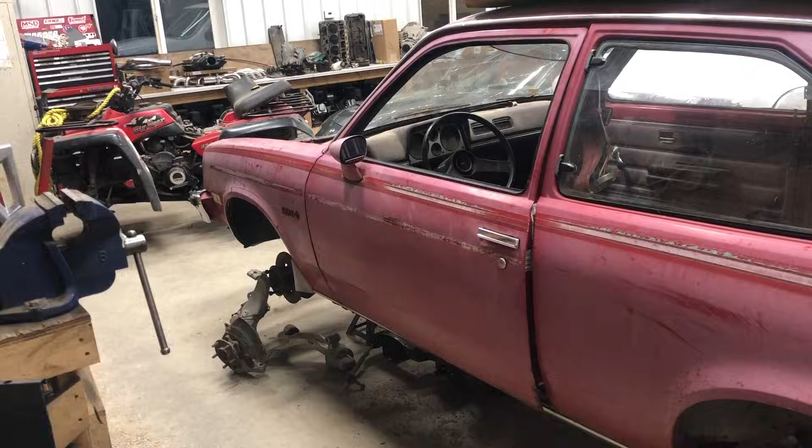We are back on the mid-engine Chevette. I haven't forgot about you. I haven't forgot about this project. It's just been on the back burner for a little bit. As you can see, we got it up on jack stands at the front of the shop here, and we're starting to take some parts off.

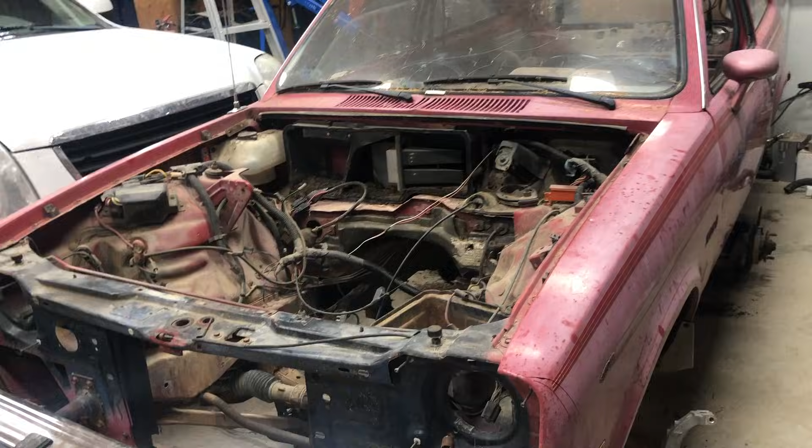If you recall, this car was actually meant to be given to my students. The girls in my grade 10 class last year rock, paper, scissored over this car, and they chose this as their potential race car. And then we started looking a little closer. Yeah, it's pretty ventilated. So we ended up giving them the cream-colored Chevette, and actually that turned out probably really well. So that leaves me with this car, and I've decided to make this to be a mid-engine, eventually all-wheel drive Chevette. We're going for broke.

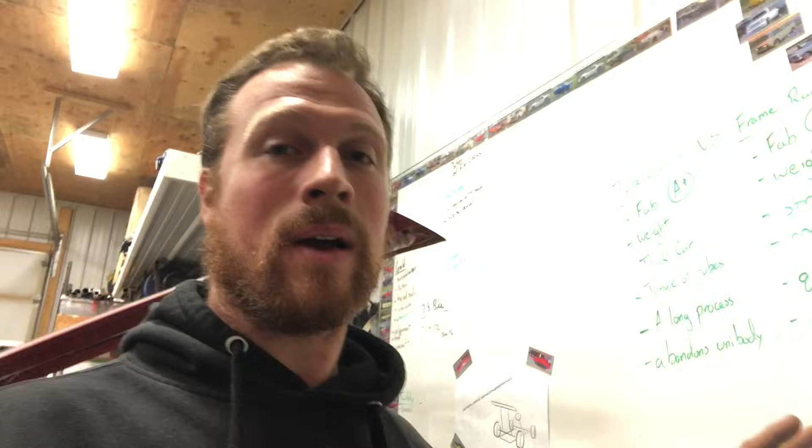Today, the first thing we need to decide is a game plan on how we're going to get there. A wise man once told me, before you actually build a project car, you need to determine its purpose. It's kind of like us as people. If we don't have a purpose, we struggle. We run into all sorts of problems. Well, my purpose for this car is to be a street car that can do some autocross or short circuit racing.

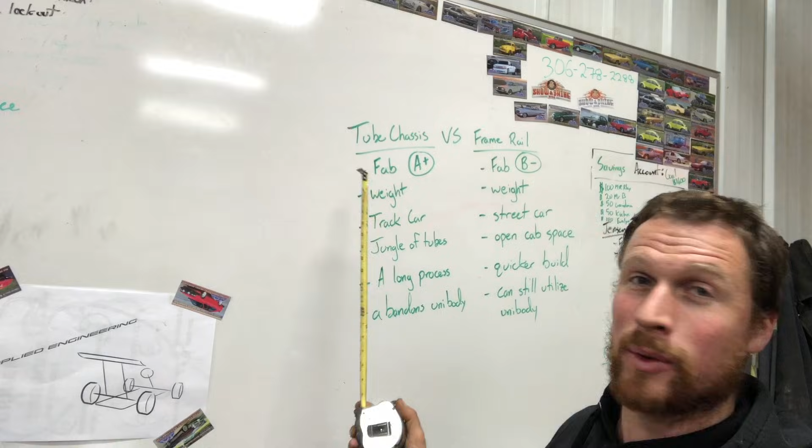Whenever you're starting a pretty intricate, very intense swap, you have to break it down to the structure of the vehicle. I think there's two camps. On one side, we got tube chassis cars, and I think a lot of people just automatically jump to that. Oh, it's gonna be a crazy swap, we're gonna make it a tube chassis car. On the other side, we have the more traditional frame rail car. And this is the decision that I have to make. Let's go through this right now.

First of all, if you make a tube chassis car, I would say you get an A+ for your fabrication skills. When people see that, oh, it's a tube chassis car, they're like, oh yeah, he knows how to weld, that kind of stuff. And I agree, yes. I haven't done a tube chassis car myself before, but I'm not sure if this is the time I want to do one. If you make a frame rail car, like some good old 2x4 HSS, you're gonna get a B-.

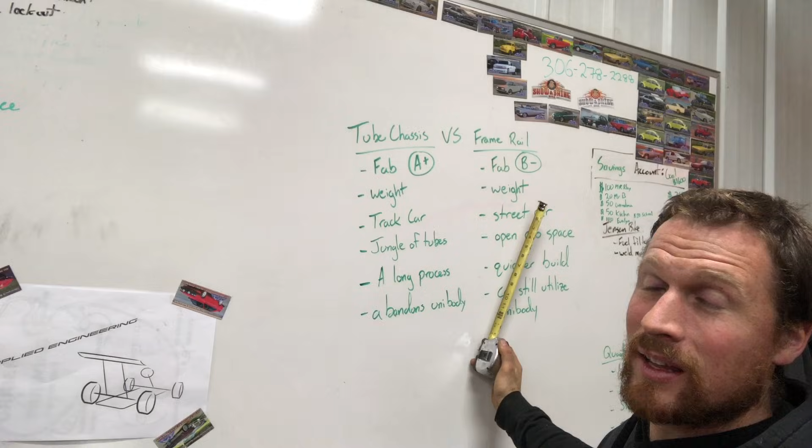Next, weight. I think this is a little controversial, but you get a few more points for body stiffness in a tube chassis car. I think in a frame rail car, if you can handle a little more body deflection, or you're just not quite ready to commit to a cage, I think the weight's probably about the same. Honestly, if you think about it, you got one 2x4 going across the bottom versus probably 3 tubes in a tube chassis car. They probably weigh about the same if you were to take like the section weight.

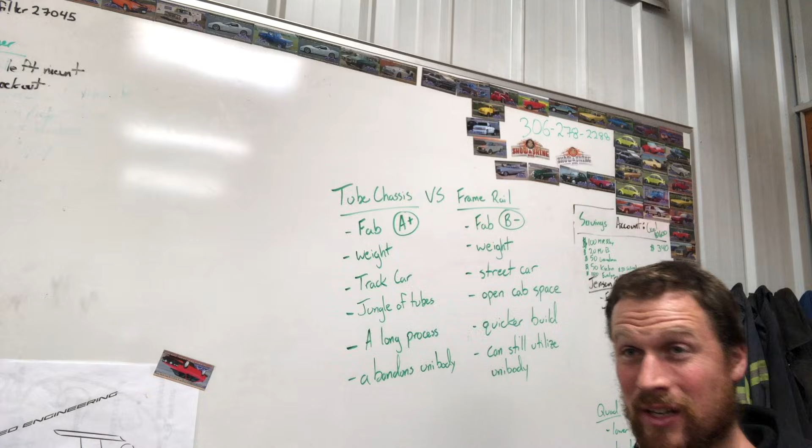Next point, and this one's a pretty big one for me. A tube chassis car, that's mostly track car stuff. Like if you get pulled over by a cop on the side of the road and he sees this jungle of tubes all around you and you're not wearing a helmet, probably more important, if you get into a collision, even a minor collision on the street in a tube chassis car without a helmet, it's not looking too good for you.

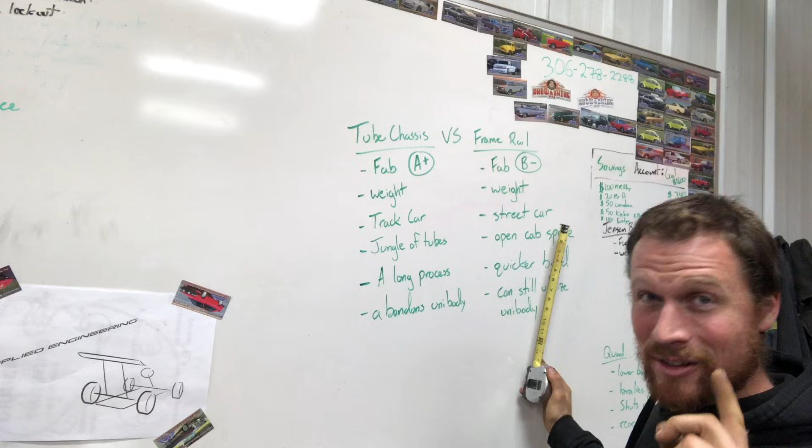Frame rail cars, they are street cars, and I kind of want to street drive this thing. That's the whole point of the car. I love driving my cars. I don't have a trailer because I don't want to trailer my cars to the track. That makes me lean this way a little bit here just for the street car part.

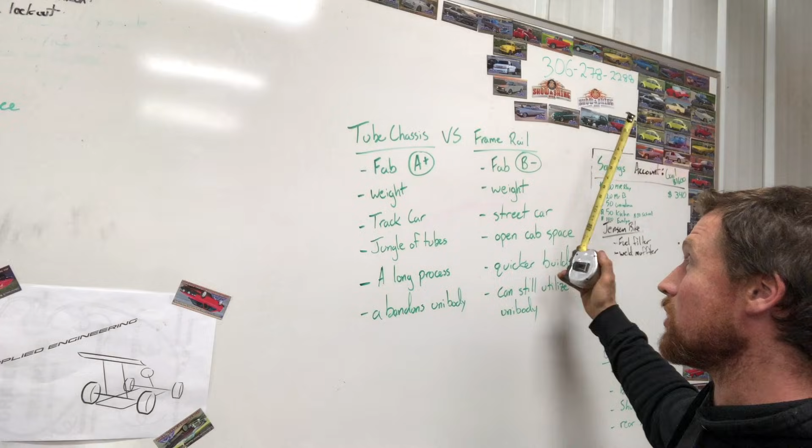And yeah, that's the next point. It's a jungle of tubes. There's an open cab in a frame rail design, and that suits me maybe a little bit because I want this mid-engine to be on display. This one was kind of the tipping point for me. It's a long process to make a tube chassis car.

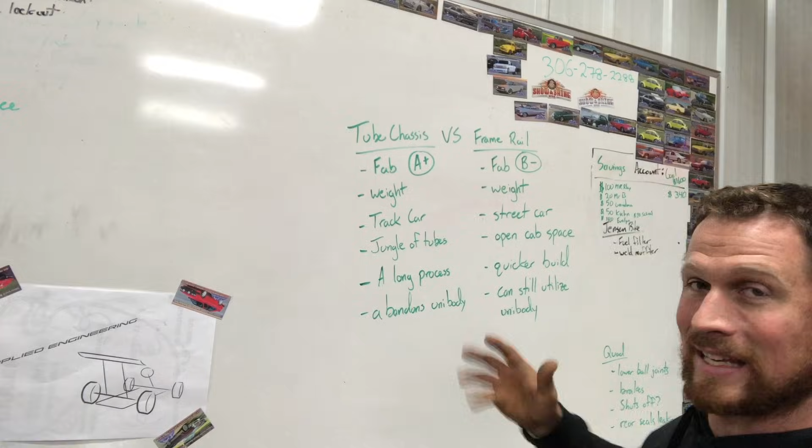Not to say that the frame rail car is a lot quicker, but it is quicker, and I don't want this thing sitting in my shop forever. A lot of tube chassis cars are sitting on an alignment rack somewhere in the back of a C-can for too many years. I want this thing put together. This whole stage is like, get it rolling. Just get it rolling so I don't have to have this in the front of my garage like a lawn ornament.

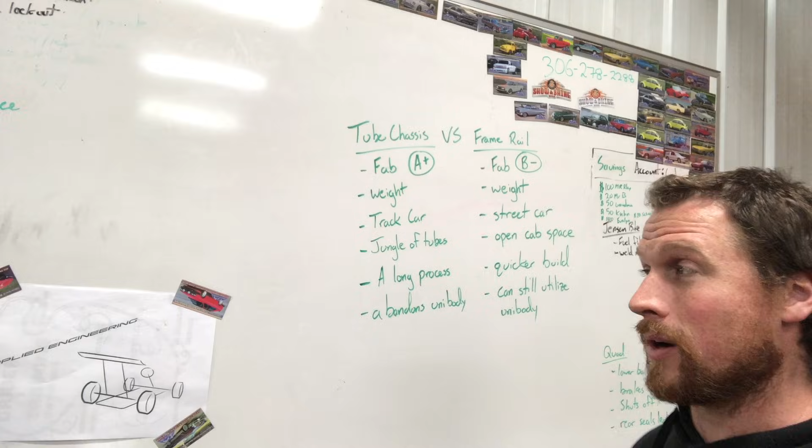Last thing I'd say, a tube chassis abandons any of the unibody potential that's in your vehicle. A frame rail car can still utilize some of that unibody that is available to be utilized for structure. I mean, the Chevette is a unibody car, so obviously there's some thought in a unibody. Not that I'm going to rely on it a lot, but you can a little bit. Like even look at the G-body cars. If you take a frame off of a G-body, it's kind of like a limp noodle. It's not that strong. And so obviously even the G-body cars rely on the body to give it some structure.

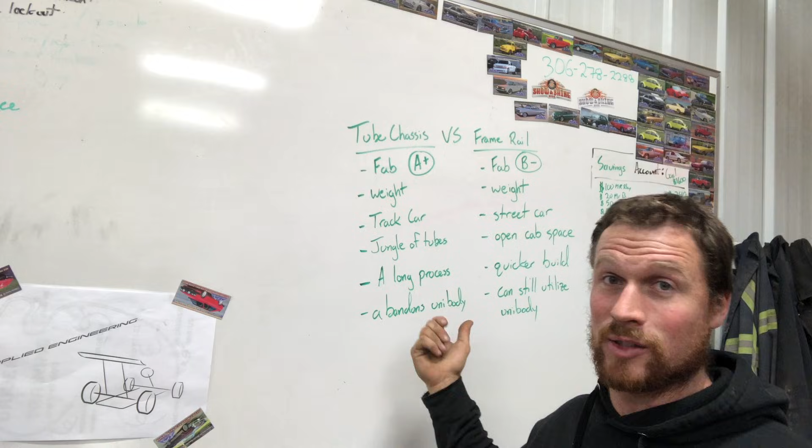All of these things considered, I'm going to go with the frame rail. Sorry, you can unsubscribe if you want, but I'm thinking we're gonna just get this thing rolling so we can go have some fun with it.

Well, actually, before we even do that, we need to just get the car better. The whole reason this car is here is because it was too rough for my students to work on. So we're gonna fix that first. We're gonna do what I do to all these Chevettes: take a nice filing cabinet and recreate this rocker panel.

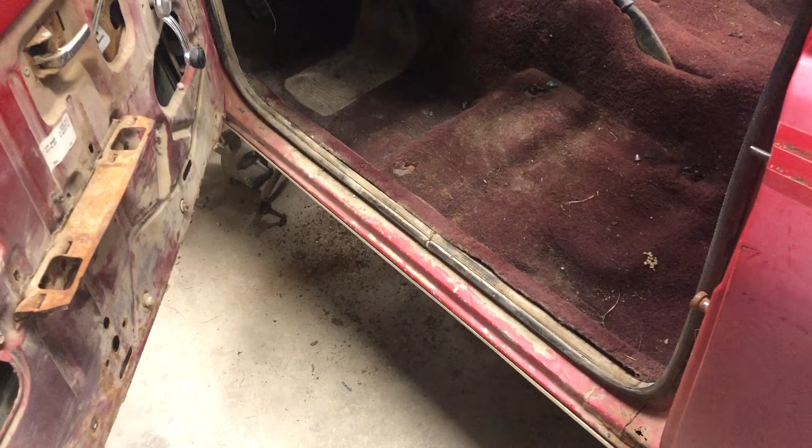The other thing we're gonna do is start building our frame. GM gives us a really nice starting point on these cars. The inner rocker panel on a Chevette is about 4 feet long, it is totally straight, and it is exactly 4 inches tall from the front all the way to the back. Thanks, GM. I'll forgive you at least one lifter failure for that.

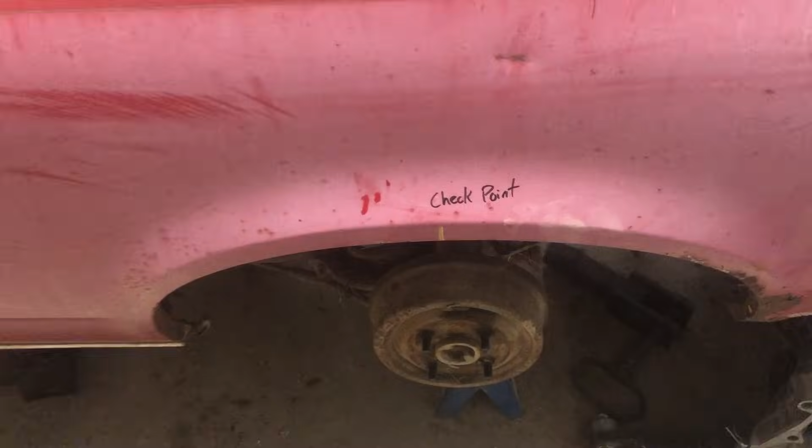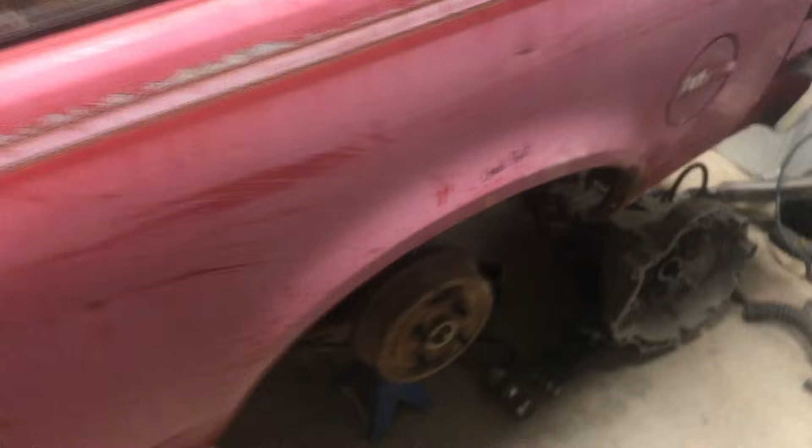But before we start cutting, there's a few measurements. I'm gonna drop a plumb bob, I already did, and I made 3 checkpoints on the car. With those 3 points, if the car were to get bumped when you're cutting the diff out or the suspension out, we can realign it so we know exactly where it goes on the floor. And that means I can mark these things on the floor now. I have the center line of the wheel and the wheel mounting surface.

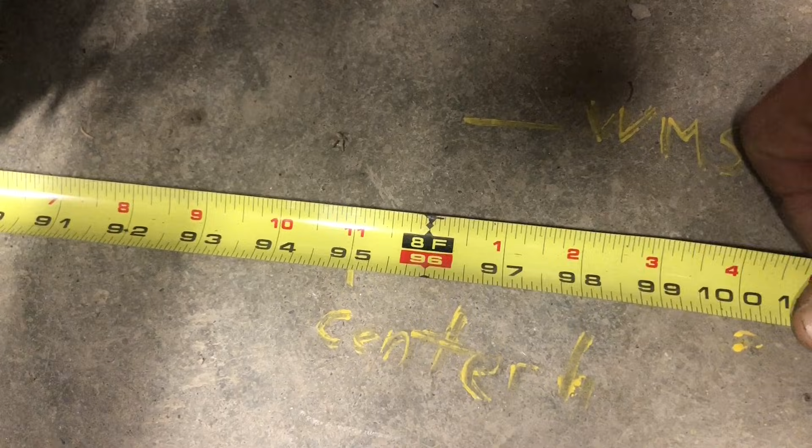This is also a good time to check if the chassis we're starting with is straight. The factory wheelbase of this car is 95 inches. We are like 1/16 big. The other side is like a 32nd big. So we're gonna call ourselves like a 32nd out from factory spec. I think that's pretty good. So now the fun part. Let's start cutting.

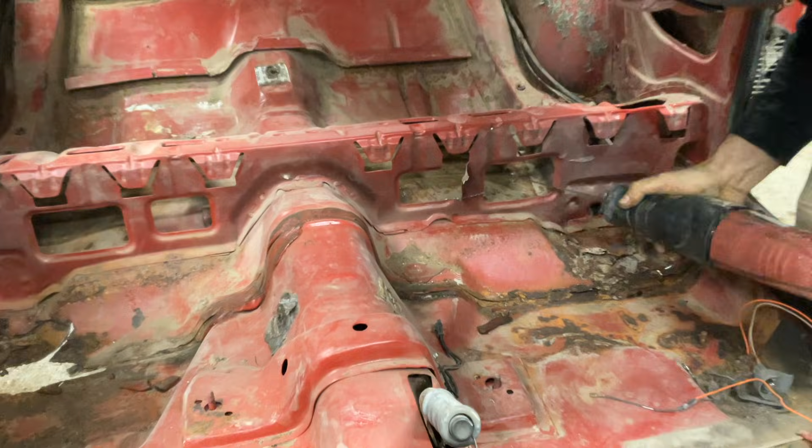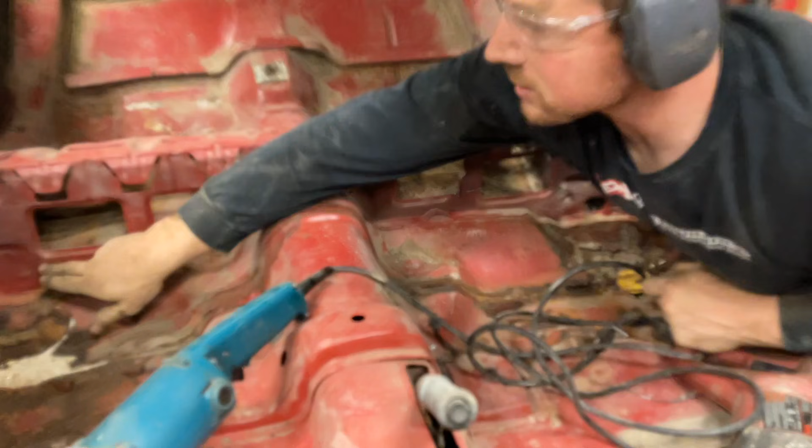Fun fact of the day, a Chevette uses the cage of the rear seat kind of like a body stiffener. If you ever look on a Chevette, you'll see this. From all the body flexing over the years, this little box structure cracks in all of these spots where the ribs are. Originally, they have a torque box along the sides underneath the door, and then another box that comes about 8 inches in from the edge on either side. And the only thing that connects the outer boxes to the inner boxes that eventually become the rear subframe is the seat.

Now that I have part of the seat removed, you can see this a little better. So here's the B-pillar, and this is the box that goes from the inner rocker panel slash rocker panel that makes a box here. And then here's the beginning of the rear subframe. And there's this gap in between the two. Nothing connects them except for what would be the seat.

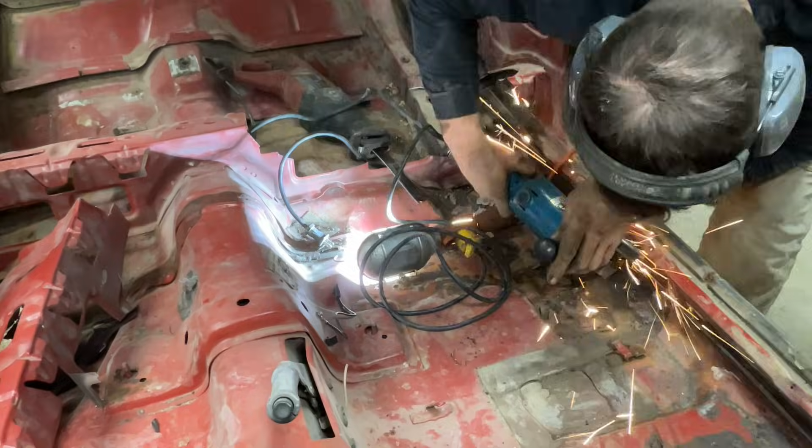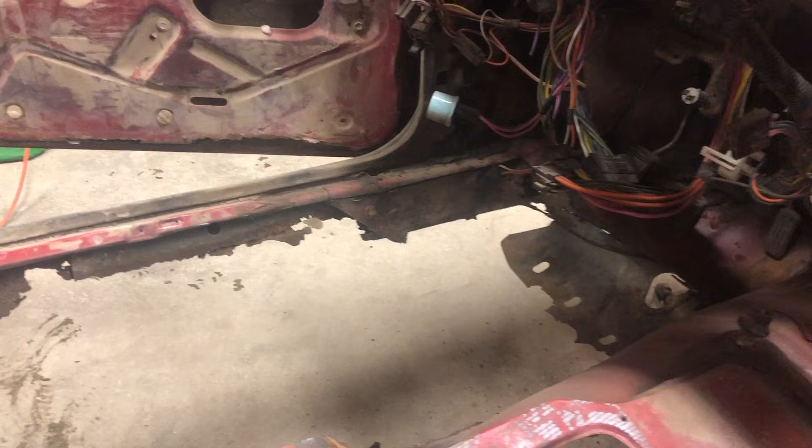Autopsy report. Yeah, it's a pretty rusty unit. I would say this car would be too far gone for really anything else. It's probably too far gone for what I want to do with it, but we're gonna bring it back because we can.

Right about there. What I'm gonna do next here, I'm gonna get some measurements that are common on both sides so I can make sure I put these pieces in the same spot on both sides. And then I'm gonna start tack welding across the top here. After that, I'm gonna make sure these are plumb to the ground.

You'll notice too, I'm only doing one side at a time. So I have that side still all together, but I'm also trying to keep the body as rigid as possible for as long as possible. Once I get this side welded in, I'll go in and do that side over there, and then I'll put some braces between the two and cut the rest of the floor out.

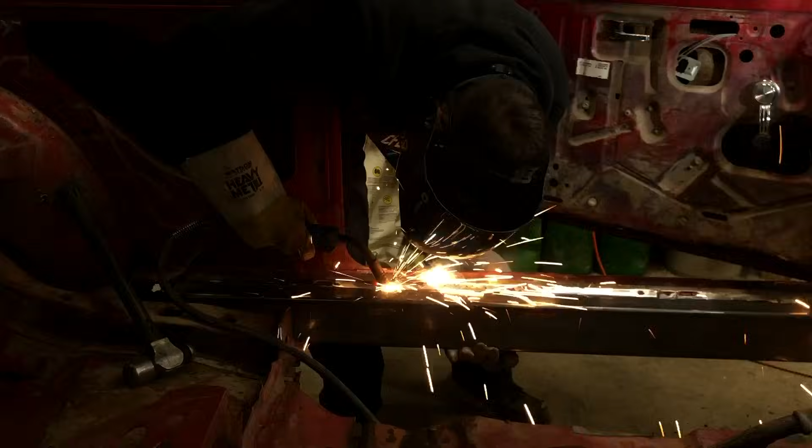And there we have it, the beginning of our frame. I know this may seem a little bit crude just to eyeball it off of this line. We are gonna get a few things right on the dot. Obviously, we're gonna get the wheelbase, the track width, all of those things nailed right in. But is this surface gonna be within 1/1000th of that surface that eventually shows up on that side? Probably not, and that's okay.

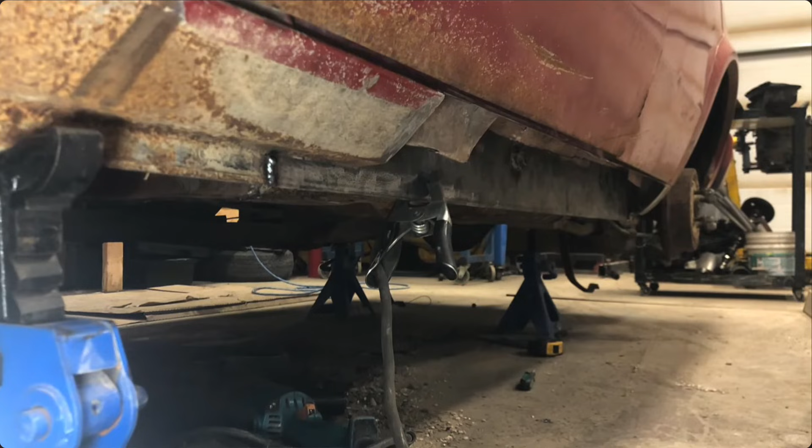If you have a regular Chevette, what I normally like to do here is just get a piece of like 3/16 flat iron that's 4 inches wide, and you can weld it. This right here is where the body seam should be. And I think this applies to quite a number of cars actually. The inner rocker panel is pretty straight. You can really stiffen up a body that way. All right, keep welding.

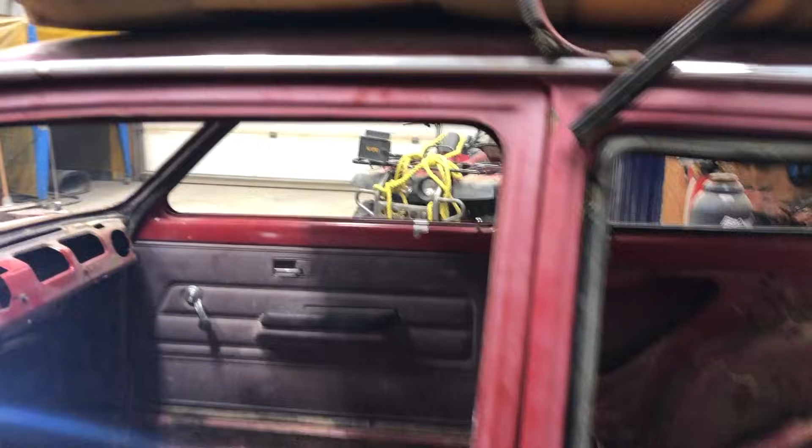Assessment time. Still straight. That's how you know it's in there. There's no weather stripping behind it right now, so this should actually be about there when it touches the weather stripping, but it lets it go past right now. But if you look at the gap itself, when I hold it there, the door gap is nice and straight, and that's what really matters. No one's gonna take a micrometer to your frame, but they are gonna see your door gap and they might close your door.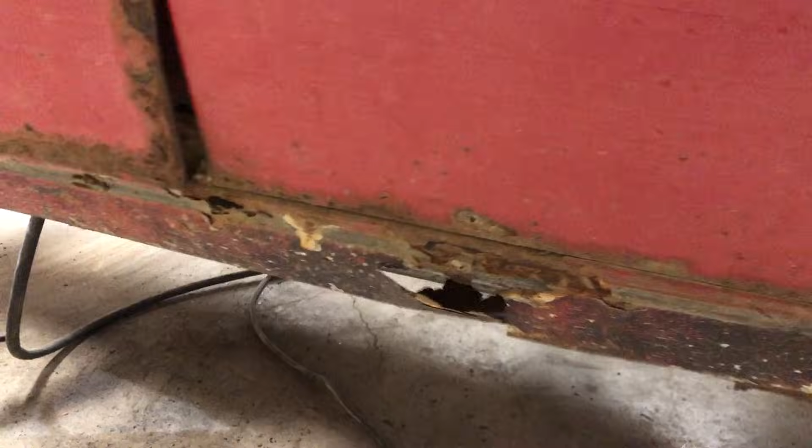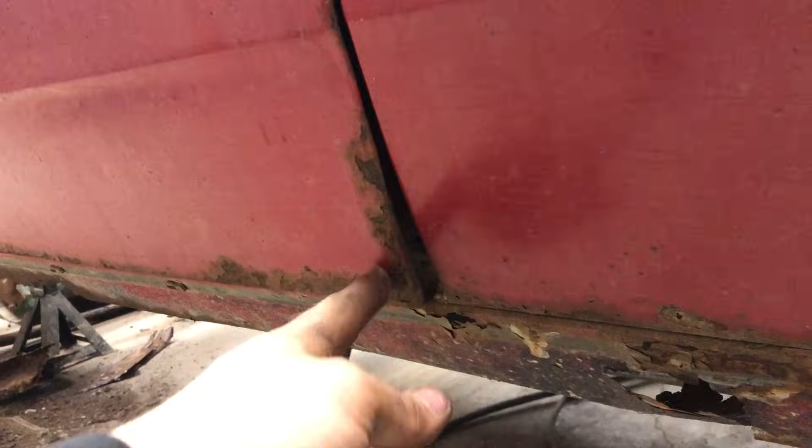This brings us to stage 2, which is the rocker panel, or lack thereof. There's a couple real common rust areas on a Chevette. Rocker panels, number 1. Second is the doors delaminating. The door is basically glued to the inner skin, so this lower part always hangs out and looks ugly. Right about here is where the welds start, and that's the important part. So I can't even use the door really as my basis for where I'm gonna guide off of, but I'm gonna have this point here and the point at the front of the door.

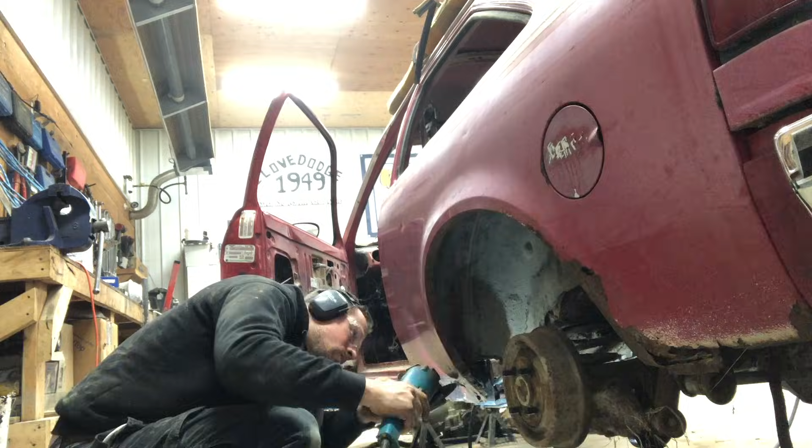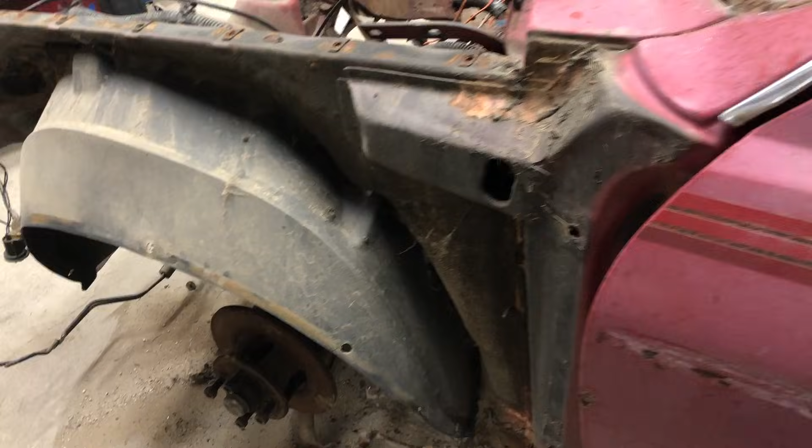Well, bodywork. It's always worse than you think. So we're gonna have to fix that. You know what though? This is maybe a blessing in disguise. We now have access to all of the space inside of here for now. Like right in there, that's gonna be where the frame keeps going on. So for now, this is just going to give us access. We'll have to do some welding in here probably anyways. And then we'll cover it up with some nice new sheet metal.

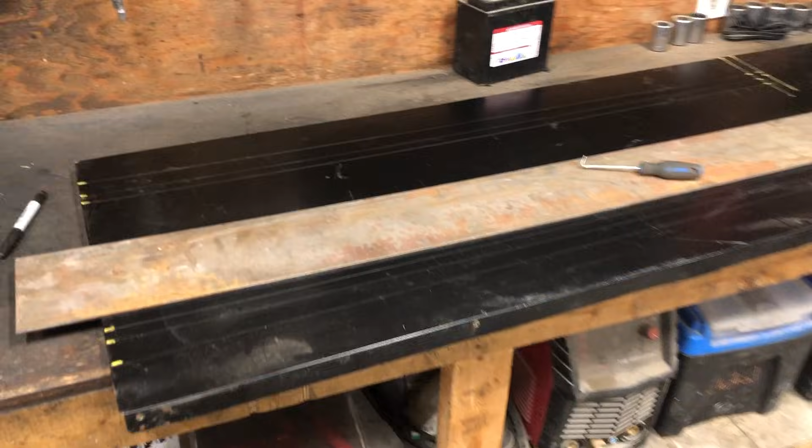Now, a moment of silence for the filing cabinet that's donating its metal to this project. So here's a rough idea of what those measurements look like. In practice, my filing cabinet is not long enough, so I'm gonna have to make this in 2 pieces, but I'm gonna butt weld them together first before I start bending them, so I have one piece of metal that I start with.

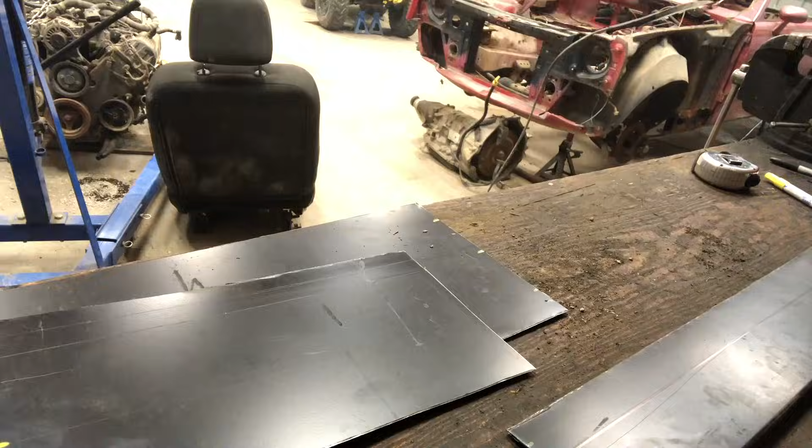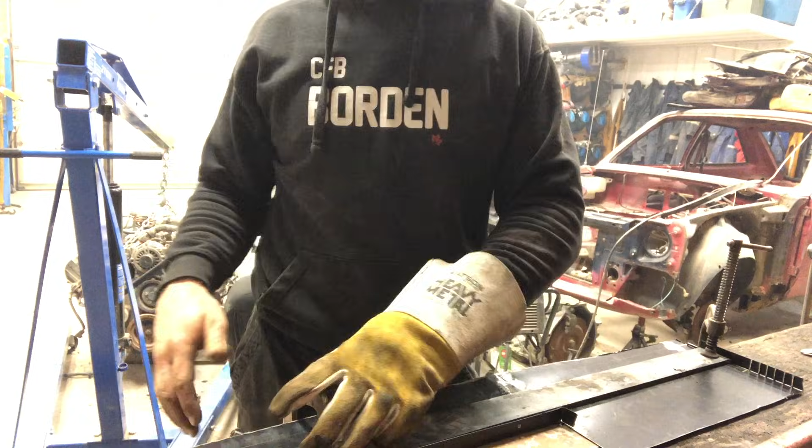Now, unless you have a really nice 6-foot metal brake, you're gonna have to improvise on this part. Making the body lines, what I have here on my bench, I got some big pieces of flat iron that are C-clamped and vice gripped right down to the bench, and I'm sandwiching the piece of metal right where the bend is supposed to be.

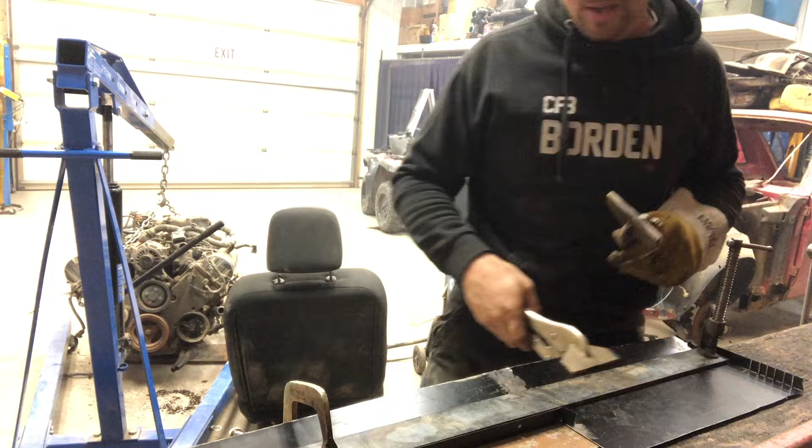Then I'm gonna take some sheet metal vice grips and I'm gonna slowly work at this. Yeah, it's not gonna be pretty, it's not gonna be the most beautiful bend to begin with, but if you just slowly work your way up and down the bend so you don't get a big rainbow in the whole thing.

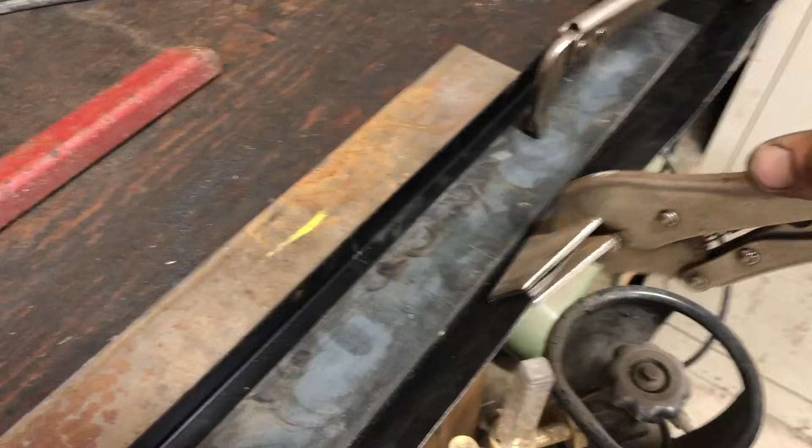There we go. I'm just working my way across this bend, just like so, all the way from one end to the other, slowly bringing this up. First bend's done. Time to do the second bend. This one's a little easier. This is the 3/4 inch fin that's gonna become the body seam, and I just have to bend it 90

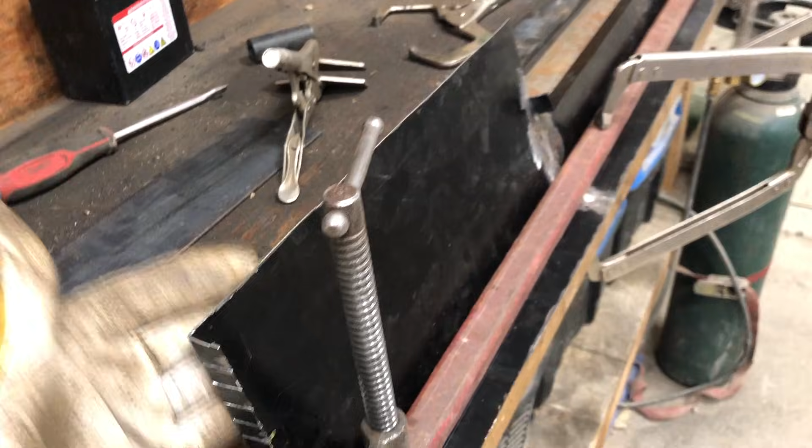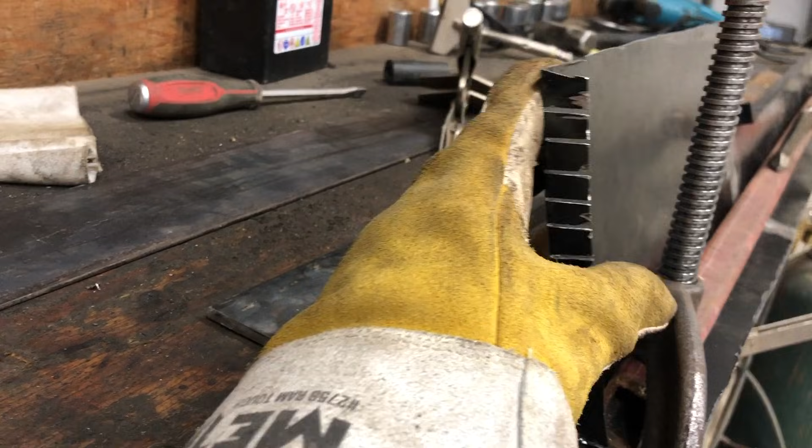degrees down. On this car, there's quite a bit of rust, a little higher than the rocker panel on the back here, so I'm gonna actually add a bit above the rocker panel. That's gonna go into this section right here. Now this part of the body is actually curved, and so I cut all these slits in the back here so that when it comes time to put it on the body, I'll be able to form it to the curve.

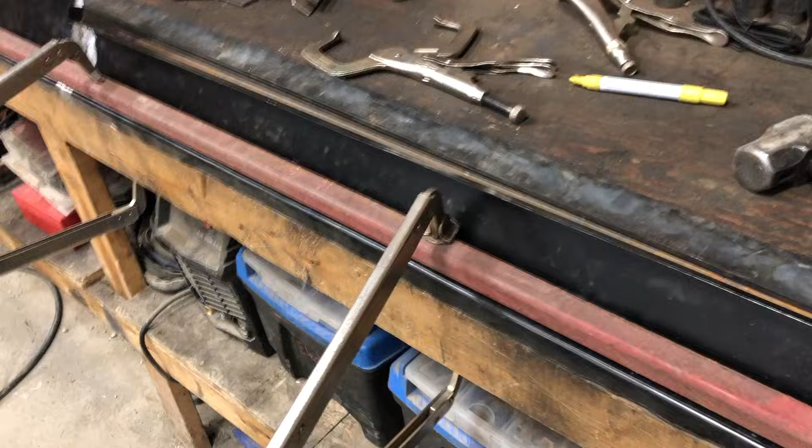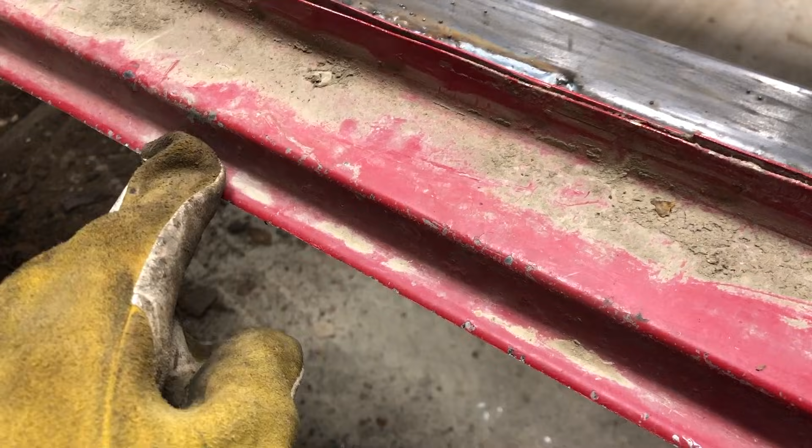And well, there we go. We got ourselves a rocker panel. Let's see if it fits. I guess something I haven't mentioned yet, I actually utilized the lip on the filing cabinet right here. I'm gonna cut this down to have a 3/8 lip like so. That lip I'm gonna utilize to hang it right on top of this and do a bit of a lap weld right in here. And that way you're never gonna see the weld.

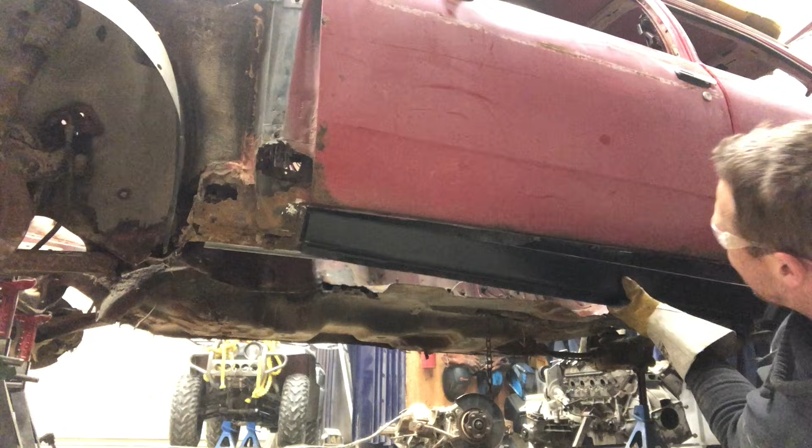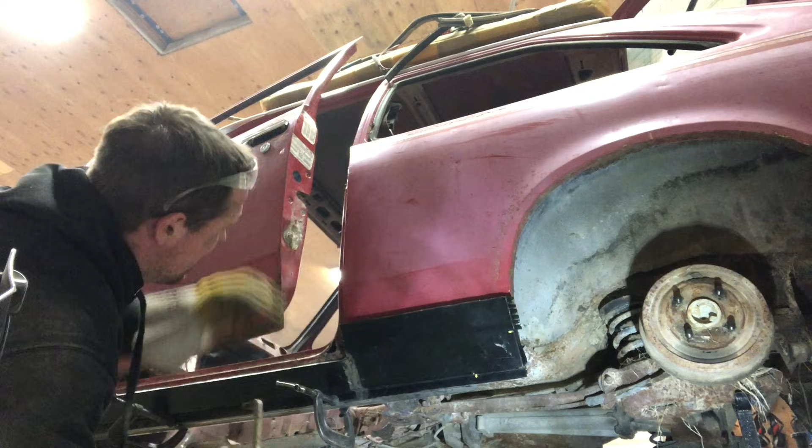Let's pop this out. And that is hopefully a rocker panel. Now, no promises this works the first time. Well, we are real close. It's actually fitting pretty good. So that's nice. We got it clamped down here to our frame.

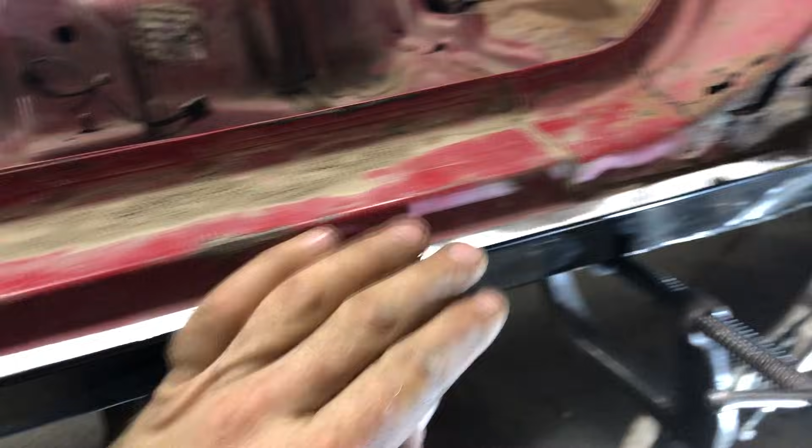I'm gonna have to do a little more fold work over here because this gets into the curvature of the body. I've cut up here until I've got to free clear metal. I found if I spaced out the bottom of the body seam 1/8 of an inch with this 1/8 inch piece of flat iron, that it looked just at the right angle. So I was maybe about an 1/8 inch out with my micrometer.

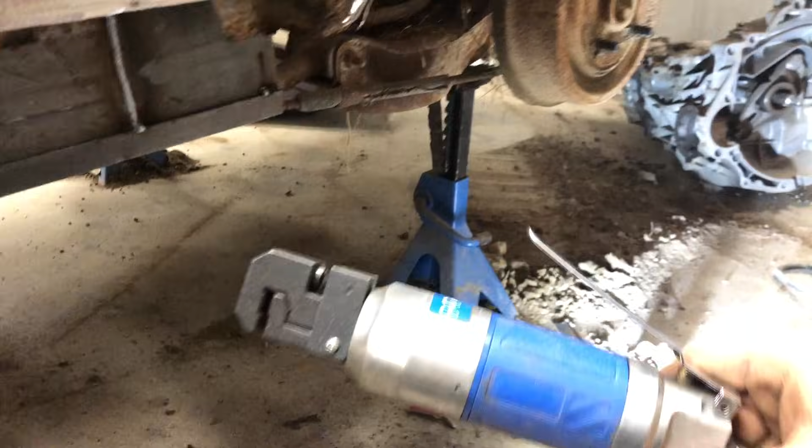Taking a bit of a weight penalty, I guess. I added a pound or two with that steel, but it's gonna look a little nicer when it's done. Then the curvature, this all should line up nice. One specialty tool that I do subscribe to is called the punch flange tool. It's a real handy dandy item. And just like that. Yeah, it's got a couple little wrinkles in it, but that's gonna be super nice to burn a nice weld in right in here.

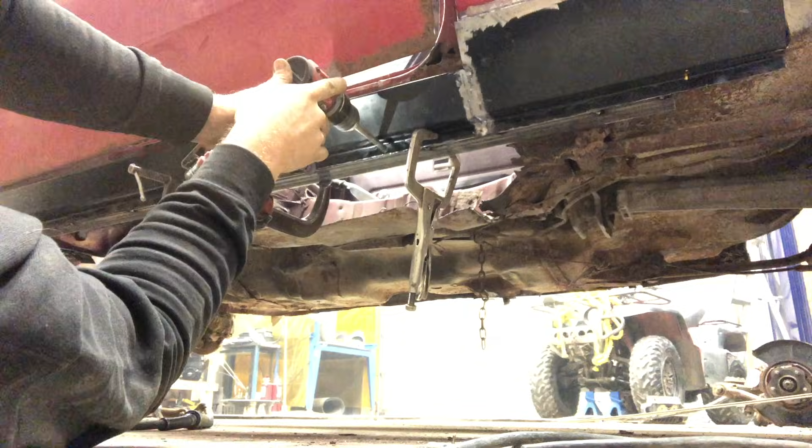And for those of you looking, yes, I see that. We're not looking at that today. That's another day issue. I put a little rust paint on the inside of our frame just to prevent some future corrosion. I drill a fairly large hole. That was a 10mm drill bit, or 3/8, whatever. So that I can fill that hole.

The reason is I got really thick metal behind here. So I'm gonna do some little circles right in the center of that to let the metal on the backside heat up that's a lot thicker before the puddle even gets close to the sheet metal. And by the time the puddle touches the sheet metal, at least we had a chance for the back metal to get hot so we don't get a cold lap.

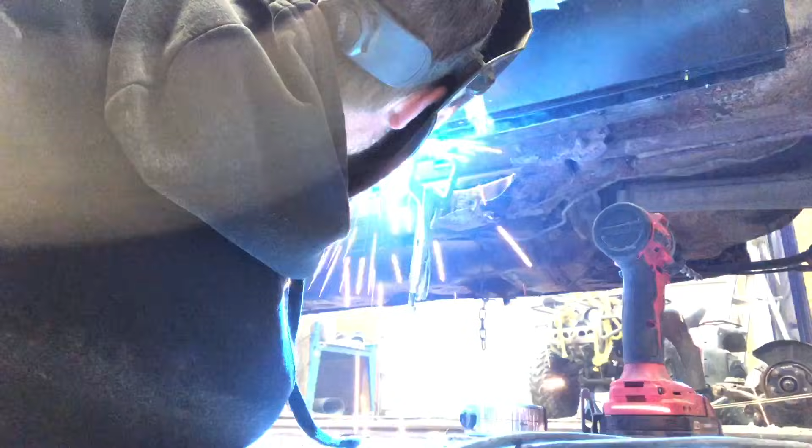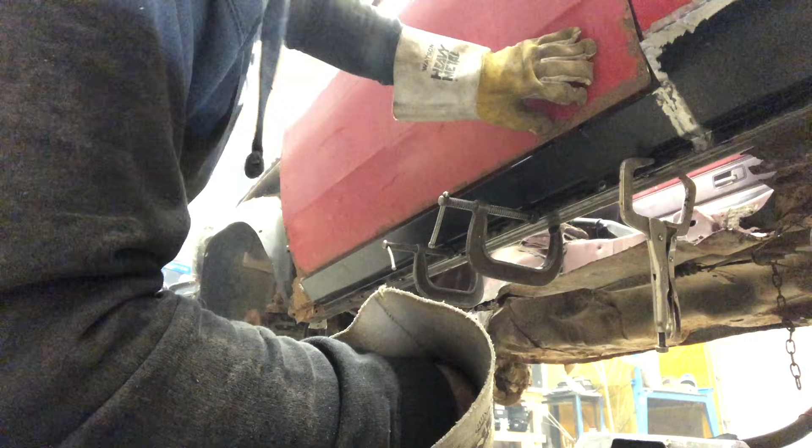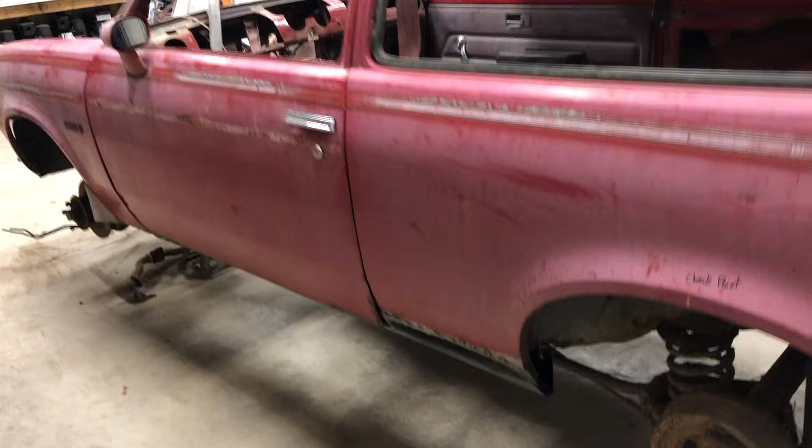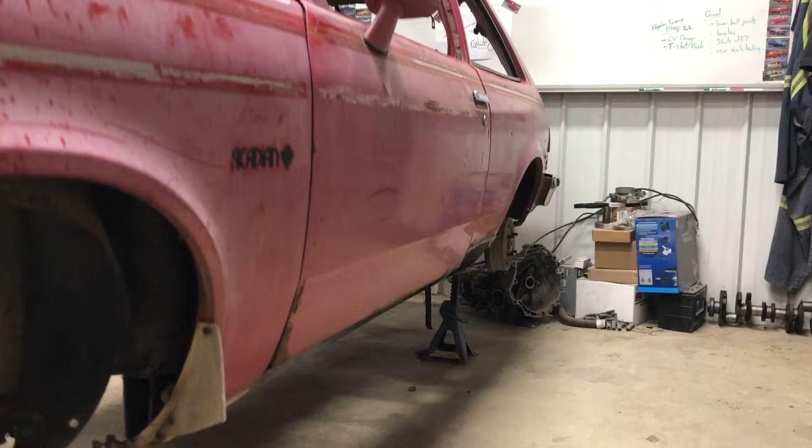That's all for this episode, guys. I gotta do all of those same things just on the other side of the car and probably weld in 20 other random things that you're never gonna see.

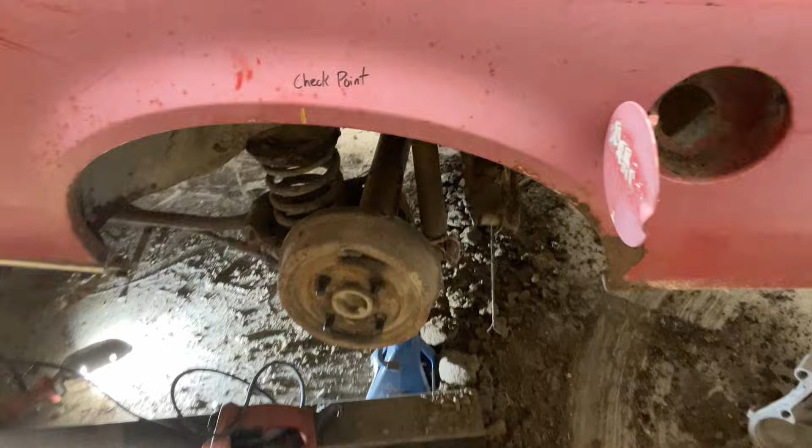Yeah. That's quite the archaeological dig we got going on underneath of here.